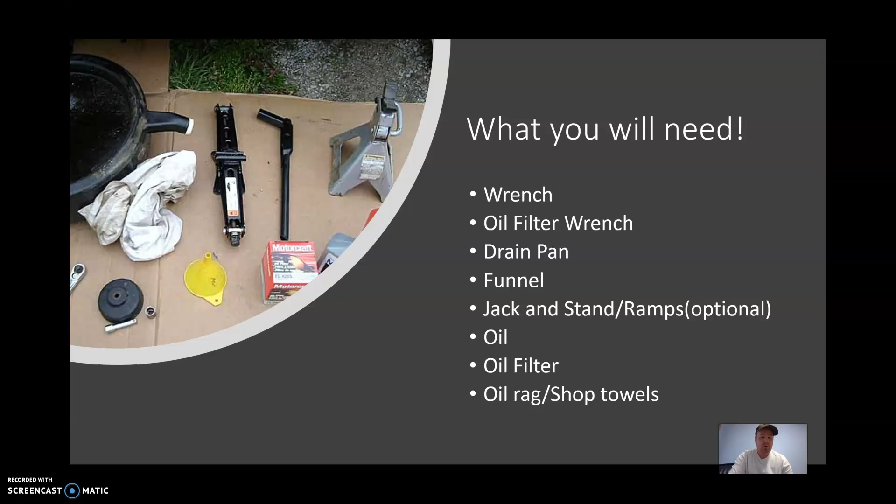Some of the things you're going to need to do an oil change: a wrench, an oil filter wrench as well, a drain pan, a funnel, a jack and stand or ramps optional, oil filter, oil rags, and shop towels. Those are all very key things.

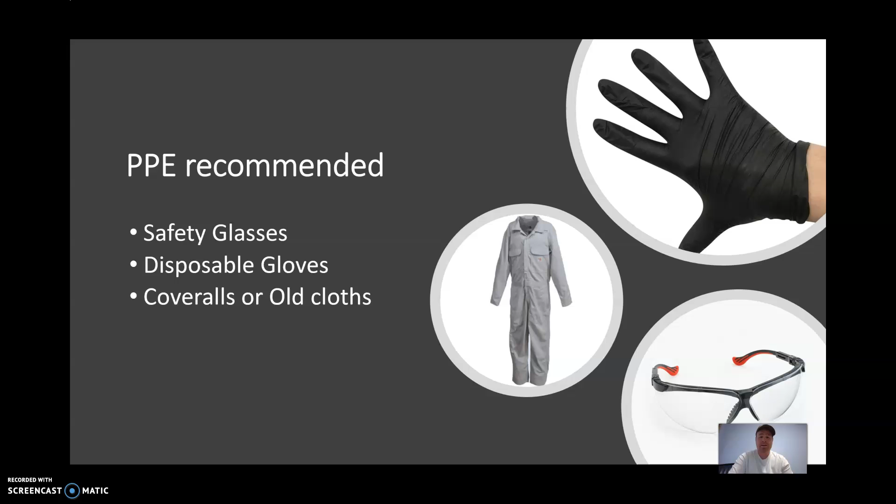You're definitely going to need some PPE just to make sure you're safe. You're going to make a mess, and you don't want to get it on you. You need gloves to protect your hands. You need safety glasses to keep your eyes safe so nothing splashes on you. You're going to need coveralls or old clothes just to keep you from getting messy and bringing it into the house.

Research your parts. Your driver's manual will have the proper oil you need to put in for the condition you drive it. Also, you can go to the parts store, tell them your make and model of vehicle, and they'll tell you exactly what you need. You can also go online - Rock Auto is one of those places that will tell you what you need.

You're going to need to find a safe location to do your oil change, whether it's your garage, driveway, or parking spot. It just has to be flat. Flat is key, because otherwise you're going to have problems setting the vehicle safely.

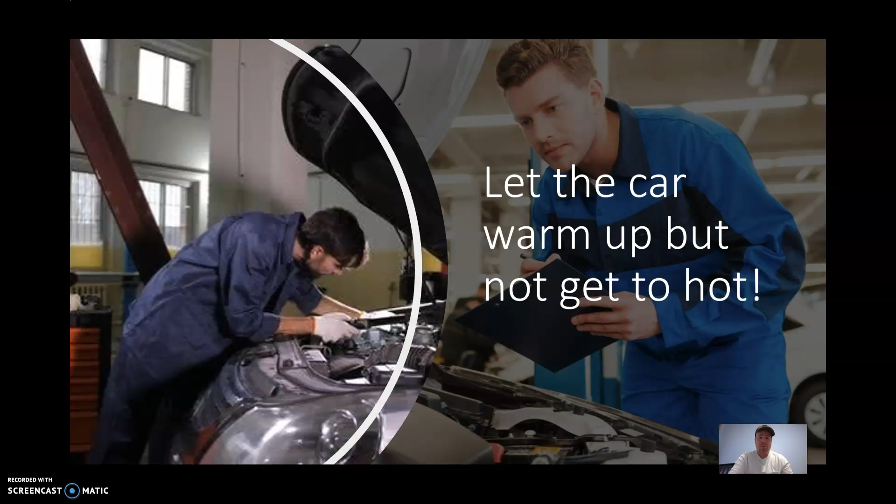One of the first things you want to do is start up the car - warm it up a little bit. You don't want to get it hot, just let it run for about 5 minutes outside while you're getting everything cleaned up, ready to go, getting your tools out. Getting it warm prevents sludge staying in the vehicle.

Now here's the optional piece: raising the vehicle. If you have ramps, set your ramps, drive the vehicle up on them so you can get under it easier. If you have jack stands and know how to properly set them up, that's definitely good for safety. When you're putting it on ramps or jacks, make sure your parking brake is set.

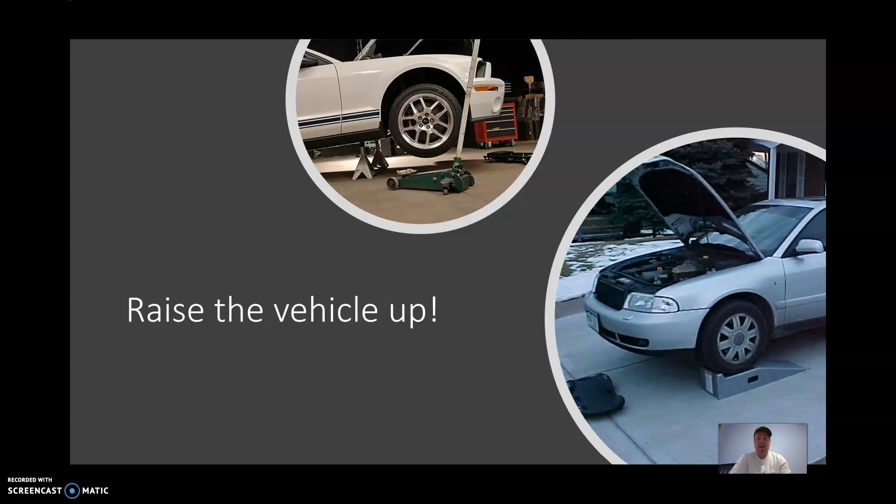Then you're going to want to position your drain pan. This is key because the oil is not going to come straight out - it's going to come out with some force, not too much, but it's going to shoot out a little bit. So you want to make sure the drain pan is in the right position.

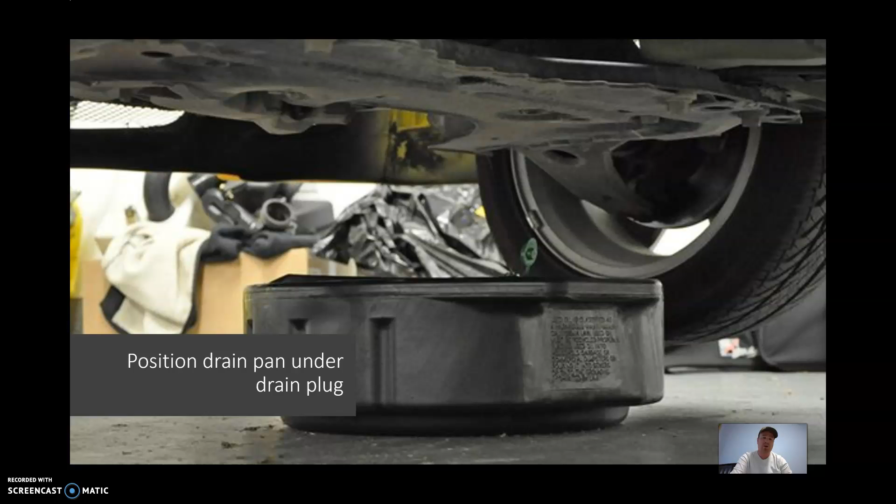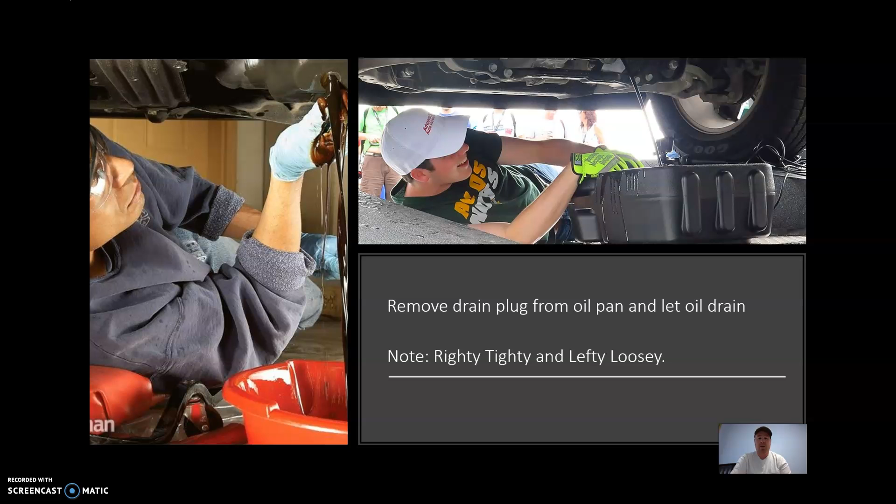Then you're going to want to remove the drain plug. Be careful not to strip it out or damage it. Slowly take it out because it is going to make a mess - it's going to get all over your hands a little bit, but you want to make sure you take it out nice and slow and carefully so it doesn't go everywhere.

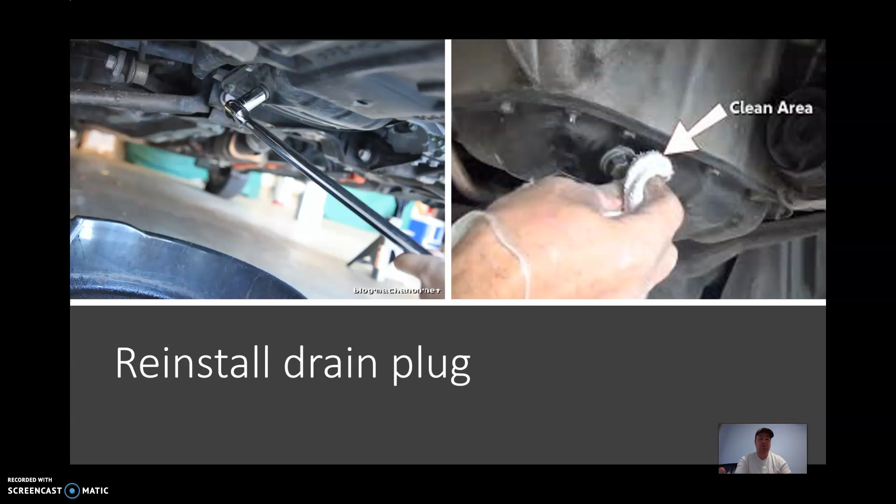When you're done draining the oil after it's sat there for a little bit, reinstall the drain plug. Don't over tighten it, just snug. Clean up the excess oil around it to make sure there isn't any residue left over. You're not looking at some spot thinking, oh, I think it's leaking. No, you cleaned it off, you know it's not leaking.

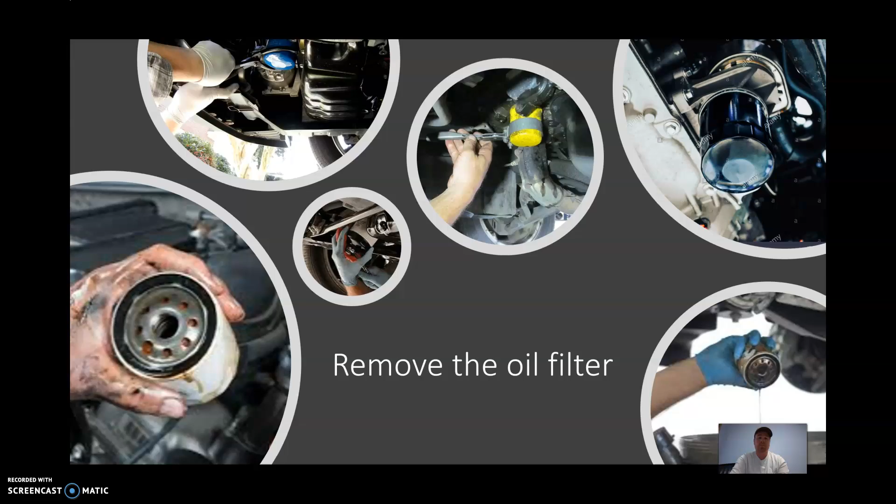Then you're going to want to remove your oil filter. There are multiple tools you can get - different oil filter wrenches, one per each vehicle. But you want to make sure you're careful when you undo it because it's going to have oil in it, and it's going to come down on it. Spin it out a little bit, let it drain, and then take it all the way off.

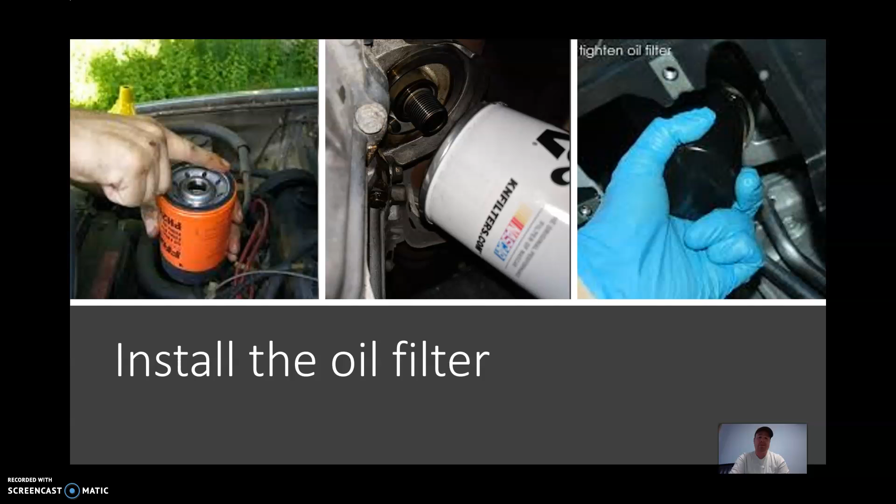To reinstall the filter, take your new filter and some new oil, and rub a little bit of oil on the O-ring, the mating surface. When you go to install that oil filter, make sure there's no old oil filter gasket on top there, so when you spin it on it's not going to leak. You also want to make sure you're tightening it hand tight.

Refilling the vehicle right after you're done with all that - make sure you have your funnel because you don't want to get oil all over the engine. Pour the oil in nice and slow and carefully, just the recommended amount that your manual told you to put in.

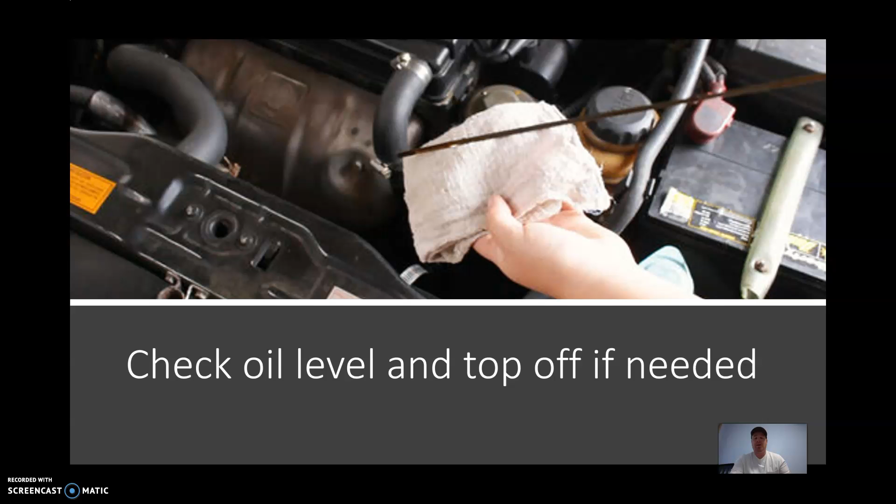Then after you're doing that, you want to make sure you pull the dipstick and check your level real quick. Sometimes you're going to have a little more than what it's stated there - it's going to say it's a little overfull. That's fine, it's got to fill up that oil filter. So please make sure you get to that point, but don't overfill, don't put a lot more in there. Just put what it says.

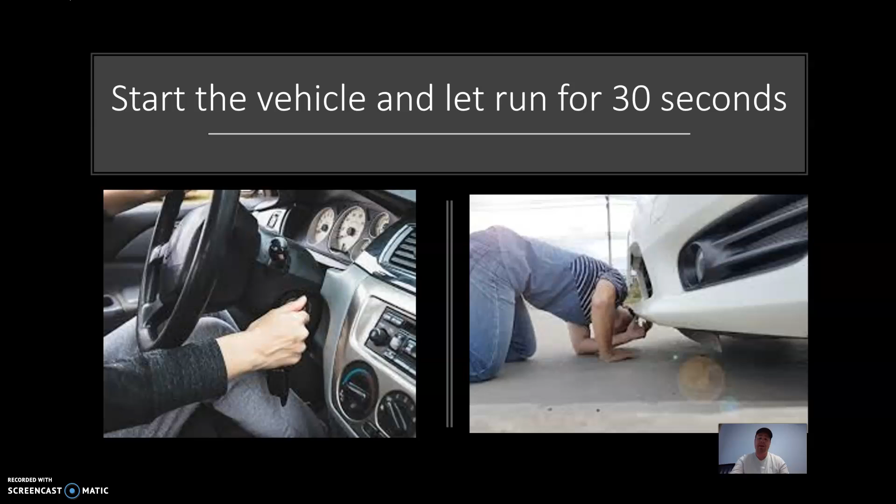Then you're going to want to start the vehicle. Let it run for about 30 seconds or so. While it's running during those 30 seconds, I always like to take a peek under that vehicle and make sure there's no leaks, because sometimes it does happen, but you don't want to be that time. So start it up, look under it.

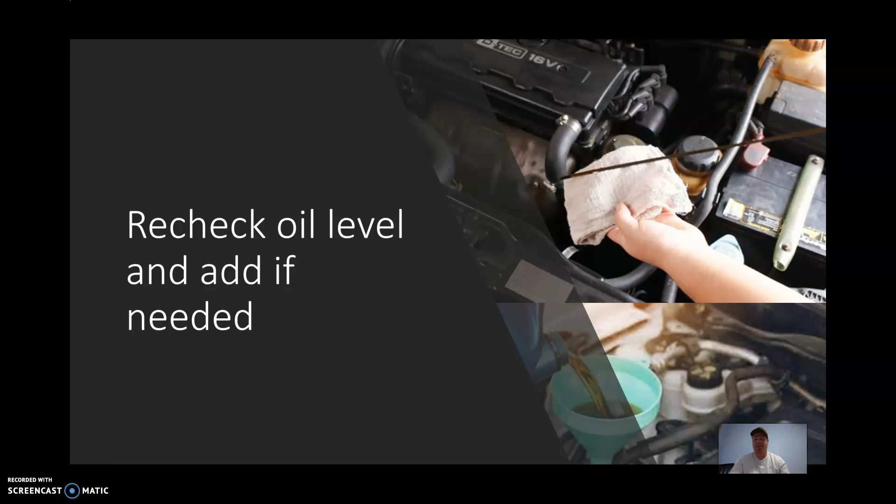After you're done, turn it off, recheck the oil level. It should be within the crosshatches of where it says add and full. As long as it's in those points, you're good to go - no more work needed on that part. That's where you want it.

Next step, the fun part: cleaning up your mess. Oil gets everywhere, it can track if you don't clean it up, it gets on everything. Use your old oil buckets that the new oil came in - fill that up with your old oil. That way you don't have to keep it in the pan laying around for animals or anything to get into.

Now you can get rid of that oil easily. You cannot throw it in your trash to go out, but you can take it back to the parts store you got it from. The counties will accept it as it has to be recycled, and this is free of charge, which is awesome. So always remember that.

And you did a great job after that - you've changed the oil in your car, you learned how to do it, and you're awesome. All right, thanks for listening. I hope you guys have a great day.